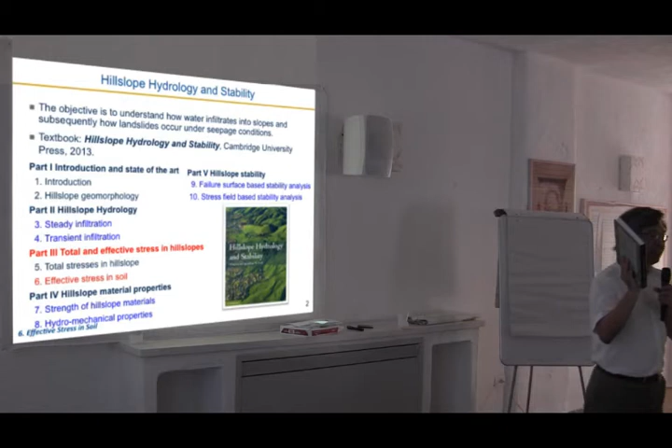So as you see, we have tried to put a framework together, which is physically based. What we try to do is not be too inclusive of knowledge we feel is not directly related to the physical process. But on the other hand, we try to best represent what happens for precipitation-induced landslide, in other words, rainfall-induced landslide. So to be precise, there are two coupled processes that occur for landslide: one is the hydrological process, and the other is the mechanical process. Our book basically, as you see, is divided into 5 parts.

The first part is about the introduction and state of the art. We summarize many of the disciplines that relate to landslide, including hillslope geomorphology as well as hydrology. The second part is designated for water process, the hydrological process in hillslope. To understand better, particularly for graduate students, we divide it into 2 chapters: one is steady infiltration, the other is transient infiltration.

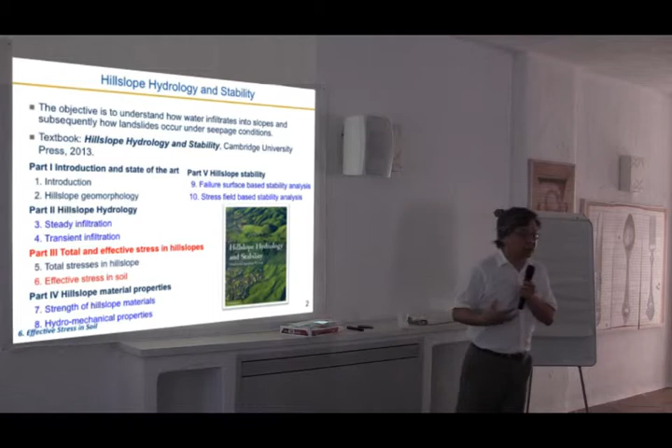What are the necessary minimum material properties? Roughly, there are two categories. One is what we call the strength. Every material has strength. Strength is a state of stress, a limit where you reach the maximum or limit state. So that's the strength. And the second part is what we call hydromechanics.

The hydromechanical property is one of the unique aspects of our framework or this book, because we unify the hydrological property and the mechanical property. If you look at the literature right now, a lot of people in mechanics and soil mechanics reinvent a new material property attributed to water—a strength property which is unnecessary, as you can see in this book. In fact, it can all correlate to the hydrological property we're going to talk about. We'll discuss that tomorrow morning.

And then tomorrow afternoon, the final section is to put all that framework—the hydrological process, the mechanical process—together into the slope stability analysis.

The slope stability analysis, again in this book, we try to divide into two parts. The first is the so-called limit analysis, which has been the hallmark of soil and rock mechanics toward engineering application. But that provides us a vehicle to go forward, which is to do the stress field analysis. This allows us not only to look at the slope as one slope with one factor of safety, but rather a field of factor of safety. It provides a way for us to move forward.

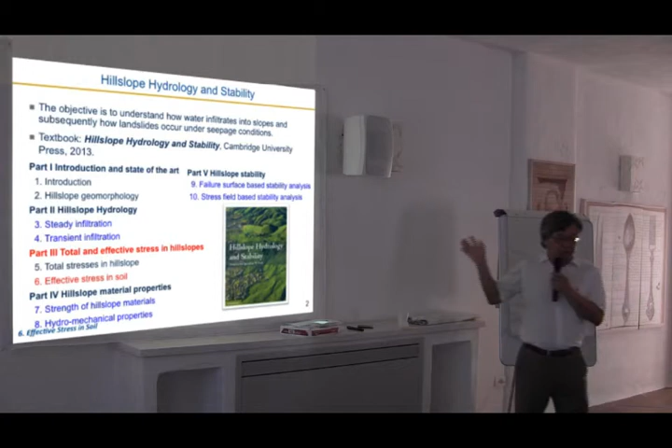It's not the end of the story. In fact, it is the beginning of a new journey, in our view, to be more accurate—because I will talk about it philosophically. What is the current status of design in geotechnical engineering? And what is the problem? How can we move forward? So the last chapter should provide a way to move forward.

We'll talk about that tomorrow early afternoon. So that's pretty much my portion of the contribution. And I'd like to start now with the first topic, which deals with effective stress.

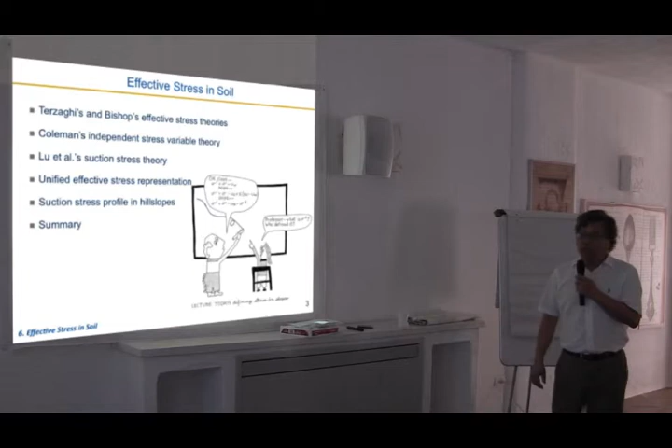For this part, we're going to talk about a few items. The first is to provide an overview of what people have learned, called Terzaghi's effective stress—for the saturated porous medium—as well as the Bishop effective stress, which was explicitly developed in the last century, the 50s, for unsaturated soil. It has some problems, and that's why in the last 40 years most people developed a new theory, a movement, setting aside Bishop. We'll come back to why.

The theory that's been around for 40 years is what we call Coleman's independent stress variable—I'll give a little introduction about that. Then the theory I've been working on in the last decade tries to unify the stress concept from Bishop to Terzaghi, from saturated to unsaturated—how we can bring it together, unified in a sense, also relating it to hydrological behavior, completely correlating to that behavior.

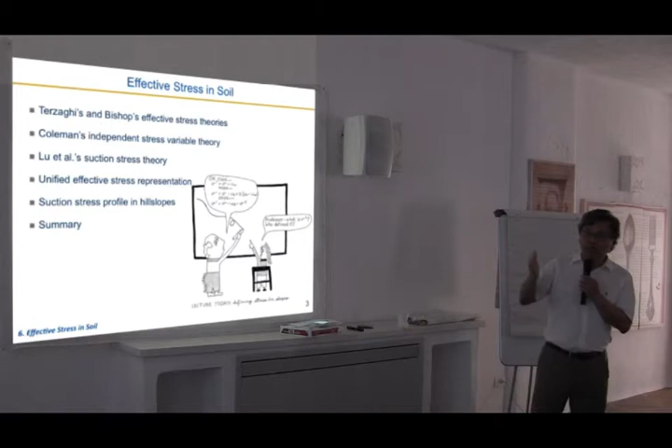We will show in detail that we actually only need to know the hydrological property in order to characterize effective stress and the unified stress concept. The unified stress concept, very importantly, introduces one new terminology I call suction stress. Suction stress is something I defined about a decade ago—it is the stress in the soil due to water. We'll talk about that now, and finally give a little summary.

I prepared this with the idea that people in this audience don't necessarily know mechanics at all, so you can learn a bit about the history of mechanics. The same goes for hydrology—you don't need much background there either. So I'll just use a few slides to talk about the history of mechanics, particularly soil mechanics, and the history of hydrology.

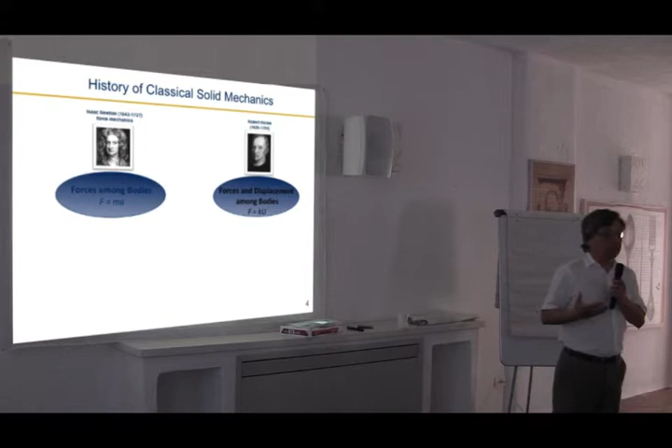In the 17th century, two well-known people contributed—of course history is always written by the winners—in this case Newton, and a little less well-known, Robert Hooke. Robert Hooke is known for other things, like Hooke's law, but he also contributed to mechanics. To some degree, historians in the last couple of decades have dug out Robert Hooke's diary and found he's not as bad as people made him out to be. Historically, because Newton prevailed, there's always been controversy about this figure.

But the bottom line is what they contributed to mechanics, the foundation—in Newton's case, looking at the amount of force among different bodies.

The well-known Newton's second law states that whatever force you have, fictitious or real, is equal to mass times acceleration. Hooke independently worked on the relation between spring constant and displacement, giving us the physical force among different bodies. That's the beginning of mechanics forming into a discipline. Of course humans studied mechanics before that, but this is when it became established as a single discipline.

Very important for moving beyond force among bodies is the stress concept. There were other scholars, but the French scholar Cauchy is the one we credit with founding continuum mechanics. He contributed much more than just that, but continuum mechanics seeks a concept that goes beyond force. It's the stress.

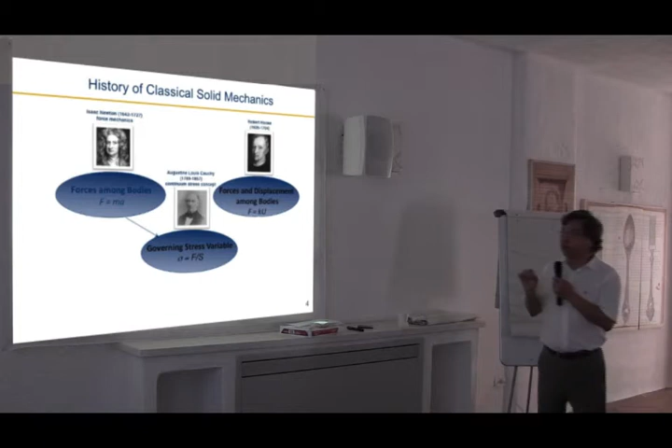So what is stress? Stress is the intensity of force. If you consider the body you're interested in, within the body, what is the intensity of the force? That's the stress concept, and it's also the foundation of what we today call continuum mechanics. So that's roughly the concept of stress.

Along this line, concerning human design, the strength of material looks at the limit of those materials under different kinds of stress. We can define different criteria, but one well-known criterion, used today in virtually all geotechnical engineering design, is the Mohr-Coulomb criteria.

This particular criteria relates stress quantities through two simple parameters. It states that shear strength equals cohesion, in other words internal cohesion, plus an additional term due to the normal stress times the friction angle. That is whenever the material's state of stress reaches that state.

In other words, in the shear stress versus normal stress space, it reaches a certain line or envelope. The material starts to behave very differently than the traditional linear or nonlinear behavior. The material starts to fail, a phenomenon we call failure. So that's a very brief overview of the mechanics part.

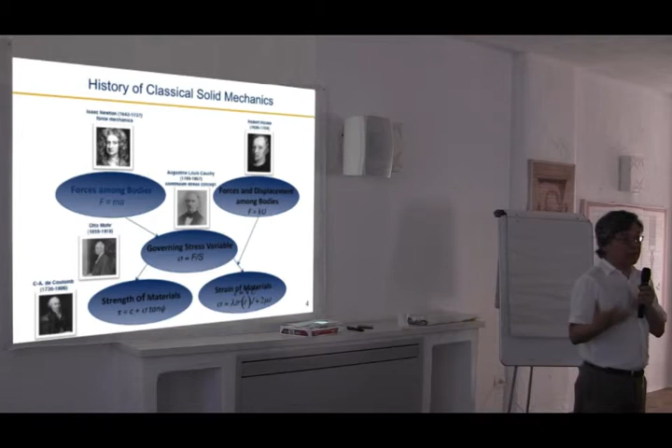If you look at engineering interests, there are two things we care about from the engineering design point of view, or even from understanding nature. One is stress, to see whether the coherent material fails or not. The other is that sometimes the material may not fail, but it displaces—in other words, it deforms under the force, under the stress. That's something we're interested in.

In order to understand the displacement, we need to know the stress. So the stress-strain relation, in its most simple generalized form, is Hooke's law. It relates stress and strain—how, under a certain kind of strain, you can define how much force or stress is produced for the material. Some materials could be stiff, some soft, some ductile, some very brittle. That's the stress-strain relation.

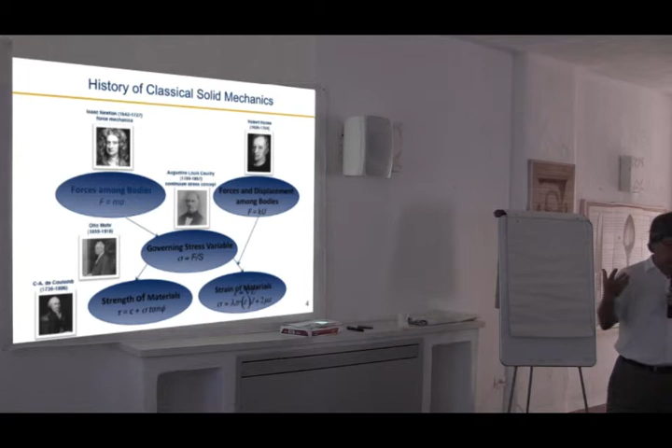The example is Hooke's law. So that's pretty much mechanics up to the single phase—in other words, we haven't talked about water yet. We only talk about it as a single phase, either solid, much like metals and wood. That's basically solid mechanics, as we sometimes call it.

Now let's quickly review hydrology. If you track back, it's slightly later than Newton's mechanics—the 19th century is when we get Darcy's law. Darcy, as people probably know well, was a French engineer in a small city called Dijon. He was an engineer who conducted experiments for the city's water supply, and he did this column test.

The column test explicitly looked at how much hydraulic gradient, or pressure difference, was applied across a column of soil, and then how much water he could collect at the end of the tube. From there, he found a linear relation between the seepage velocity and the gradient of the pressure—or, more generally, the gradient of the total head.

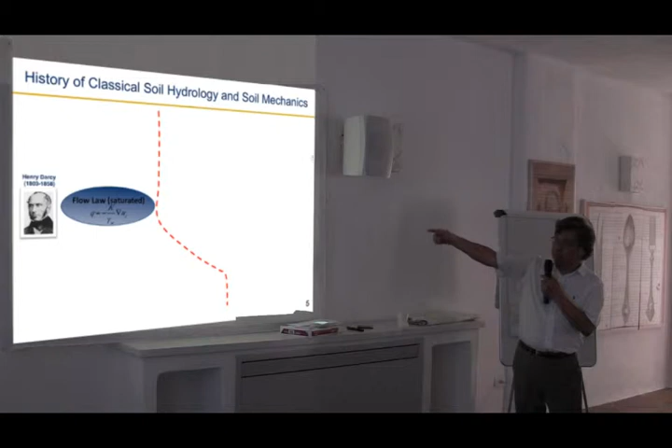The proportionality between the two quantities, the gradient and the flux, is what we call the proportionality constant—sometimes called hydraulic conductivity, sometimes called permeability. It can also be generalized into intrinsic permeability, which relates to the unit weight of water, if you convert between pressure and pressure head. So that's one of the foundational studies.

Later on, people found that it's not necessarily the pressure gradient that determines whether there is a flow from one point to another. The energy in a unit of water can be stored in a pressure form as well as in a potential form. Potential here means gravity, the Earth's gravity. So the pressure can be split into two terms: one is the pressure head, the other is the elevation head. In terms of energy, it's stored in these two parts per unit volume of water: how much pressure, and how high it is under Earth's gravity.

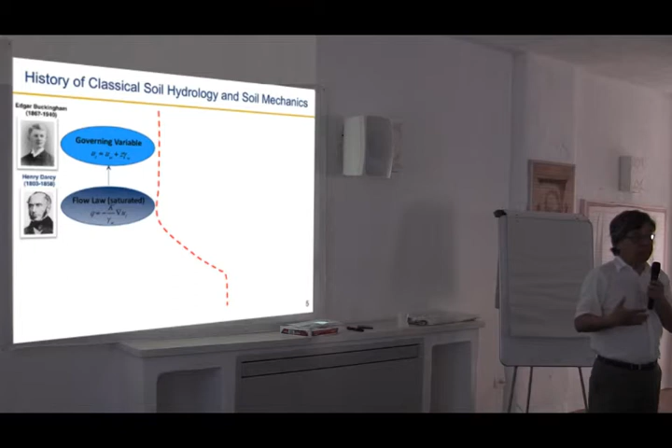That's the total head concept. It unifies the entire potential field. So for anyone concerned, the concept of pressure head was established before this, but this extends it.

Another important work in the early last century considers the transient effect. In the porous medium we talk about, soil and rock, when water flows into a unit, it doesn't necessarily flow out at the same rate. There's a difference, because of compressibility and because it's often multi-phase, there is a storage effect. That's what we call the Richards equation, which is a statement of continuity requirement, relating to the continuity equation.

In hydrology of partially saturated soil, two very important considerations are introduced. One is how to define water content. There is a relation between water content and what we call matric suction for each soil, which is a material property.

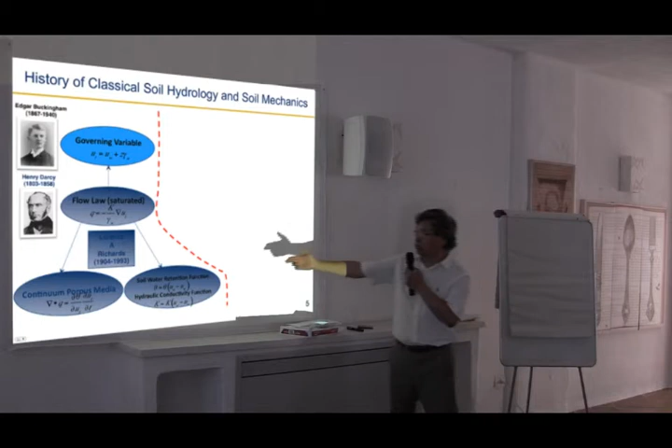Even in Darcy's law, to define a head, that total head has two parts. The elevation part, which can be decided by the reference point, and the pressure part, which under partially saturated conditions depends on water content. That's one of the relations, sometimes called the soil water retention curve, sometimes the soil water characteristic curve. It's a material property because each material has its own characteristic determined by the material itself.

Not only that, for each material it also depends on the wetting and drying state. In other words, if we started very dry or with a certain water content, it will be different. This has a huge implication for landslide problems, because landslides often occur after a dry period. Most of the time we don't have rain, right? Rain only occupies a fraction of a percentage of the year.

During the raining process, most of the soil near the surface on a hill slope is under the wetting condition. But when the rain ceases, it doesn't dry immediately; it starts what we call the drying process. The wetting process and drying process turn out to be very different. We'll learn about these differences in today's second section.

The other consideration is how fast water can move in soil. In the saturated case, we call it hydraulic conductivity. In the unsaturated soil, it's also called hydraulic conductivity, but it's a function of the matric suction, meaning it depends on how wet it is. Sometimes you think of it as a function of matric suction, sometimes as a function of water content, since matric suction and water content are connected by that first relation.

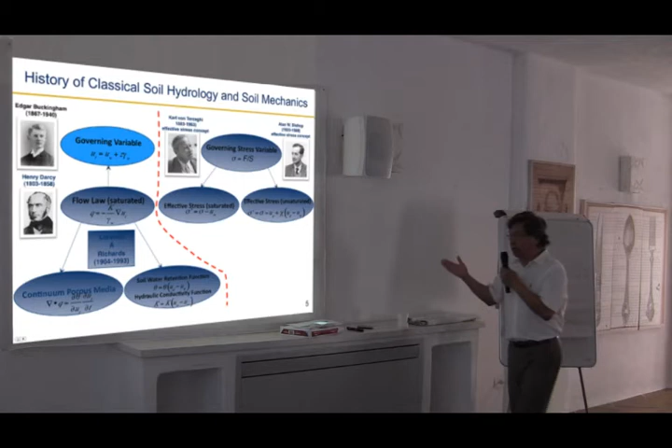But there are some controversies and some experimental data, either misinterpreted or some real problems with Bishop's effective stress. One problem I will point out—this is the main thing that is my contribution—is that if you have soil, when it's dry, just like clay for example, in fact it has a lot of internal stress. So if you look at Bishop's effective stress, it just cuts to zero, meaning there is no internal stress, which is not true. But it is true for sand.

For example, if you go to the beach—of course here it's pebbles, not a beach, not a sand beach—but if you go to a sand beach, you know that dry sand does not have any cohesion, but moist sand has. But for silt and clay, this is not true. Even when it's dry, it actually sticks together. So that's one of the missing parts of Bishop's effective stress.

So to move forward, we actually come up with the unified effective stress. The unified effective stress I propose has been validated in the last decade.

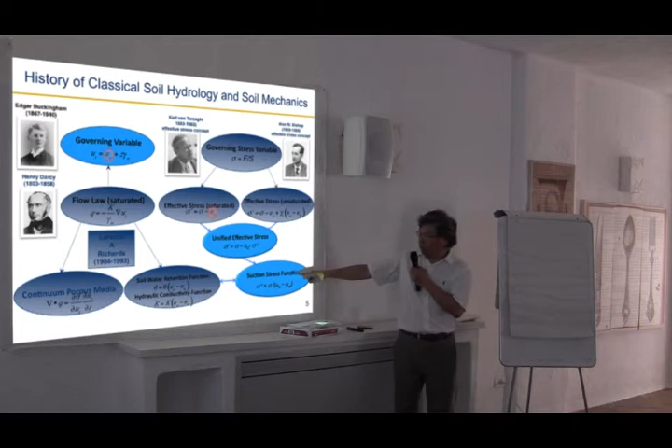So as you see, to link these two, we go further. Now we define this quantity, the suction stress, which defines effective stress, which essentially is the role of water under the saturation condition to the stress, but also unifying between these two properties. So we have reached the stage where if you know the suction stress characteristic function, you can also get the characteristic and hydrological function, vice versa.

So both ways we have verified, one is mechanical, the other is hydrological, but actually they can be defined by the common property. So that's the status of what we have, going back to the connection between these two.

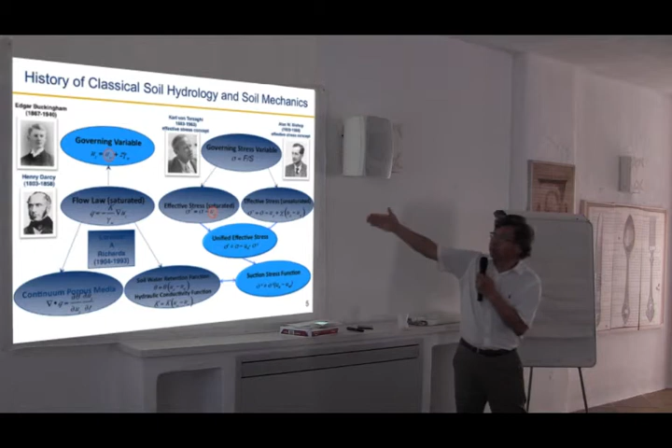As I presented, in fact, it is the history of the last half century or so. These two fields, the vadose zone hydrology and soil mechanics, have been developed in isolation because we've been told to do so by our professors, by our discipline. But in fact, they can be unified, and that's part of the work we have been trying to attempt, to unify these two disciplines.

So now let's talk about some detail of the stress issue. If you look at Terzaghi's effective stress, it basically says the stress concept can be generalized. The stress concept defined by Cauchy early on, you can generalize for a saturated porous medium by drawing a unit volume, sometimes representative elementary volume. On that volume, you only put a stress quantity there, in other words, the intensity of force.

But you cannot just put the total stress, you also have to put water as an additional stress. Under the saturated condition, that water additional stress is compressive, so you have to subtract it from the total. That's the unit of that, also accounting for a saturated soil porous medium. So this is Terzaghi's saturated equation.

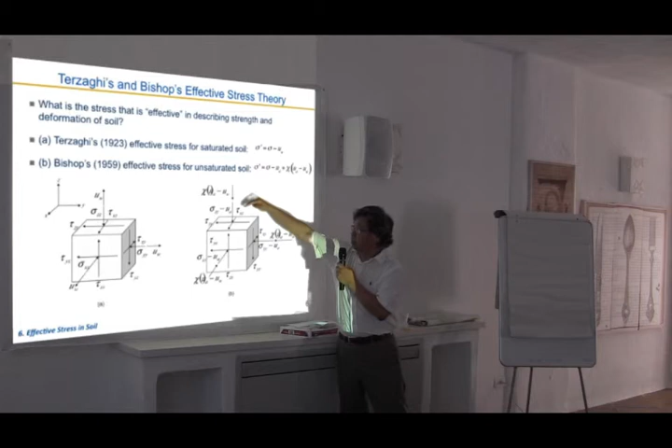For Bishop, he said you can put an additional term, but instead of compressive, it's tensile. So it's in the opposite direction, but if you do this kind of free body diagram, it's equal to matric suction times some scale factor.

Since then, as I said, some of the experimental data was interpreted wrongly at the time, indicating that Bishop's effective stress was not valid. Alternatively, since the 1960s, there's a branch of people, a school of thought, pursuing the independent stress variable approach. This independent stress variable concept is quite different than the traditional single stress variable.

What it basically says is that we have to define two stress variables that are not related to each other. So what are those two stress variables? One is the total stress. The other, just like drawing here, is the matric suction, or the negative pore pressure.

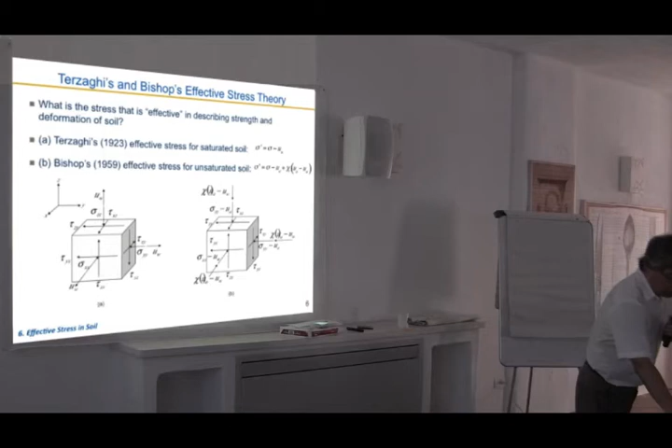So upon that, it's different than what Bishop says about stress being effective. In this theory, we do it independently, so we have to look at matric suction as a stress variable, of course in tensile form. So in the unit volume, it shows like in the bottom. That concept has been pushed forward since the 70s.

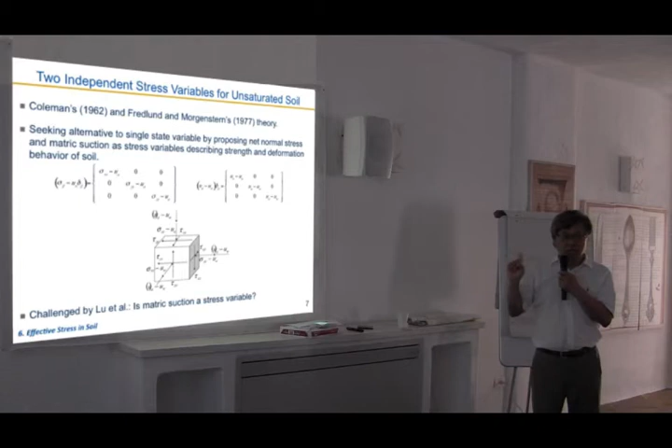If you look at the literature of unsaturated soil mechanics, a branch of soil mechanics, from the 60s up to the 90s, most of the development is based on this framework. Until about 2000, we start to challenge this concept. Let's go back to my first few slides about the stress concept - is this quantity, the matric suction, a stress variable? That's the beginning of the journey where we find that, in fact, it is not a stress. So I will say something about why it's not a stress.

So we start with the stress variable we define, called suction stress. Suction stress is equivalent to, if you draw the elementary volume, a stress quantity.

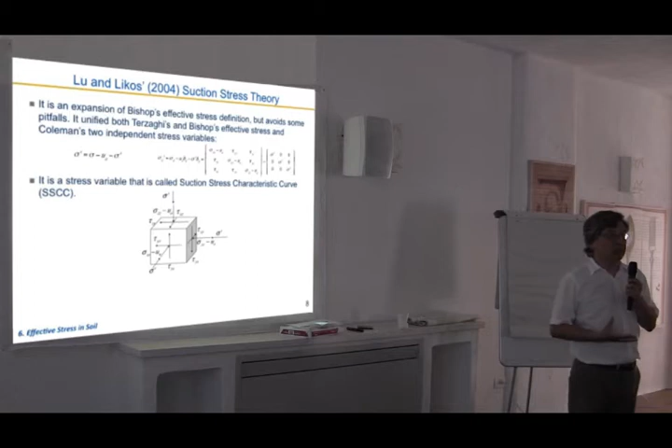In other words, stress is the force divided by unit area. But if you look carefully, matric suction itself is not a stress. We call this stress suction stress. I'll come back later about the matric suction. For the suction stress itself, in the case of unsaturated porous medium, it depends on your saturation, depends on your matric suction—in other words, the state of wet and dry.

So we can ask ourselves a couple of questions. One: is it effective in describing strength and deformation? This is very important because our concern as it relates to natural material is whether it's going to fail, and how much it's going to deform even if it doesn't fail. The second question is how we determine that, because you can develop a theory, and many people have been attempting and continue to do so. The question is, can you characterize that? Can you measure it, or quantify it in a very simple way that most engineers or technical people can use? That is a big, important challenge and question.

Now let's look at the issue of why I make the statement that matric suction is not a stress variable. This diagram actually shows clearly why matric suction is not a stress variable.

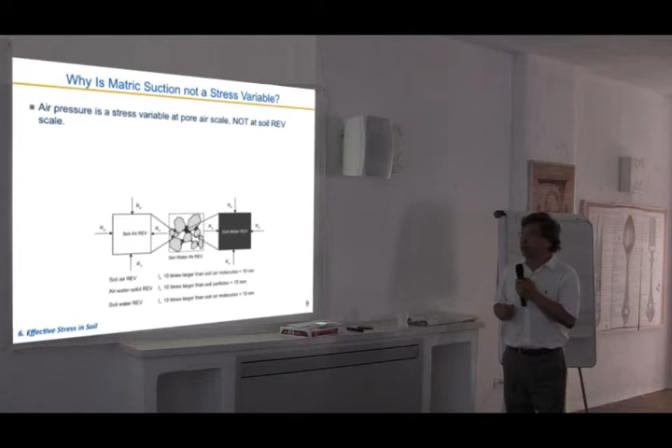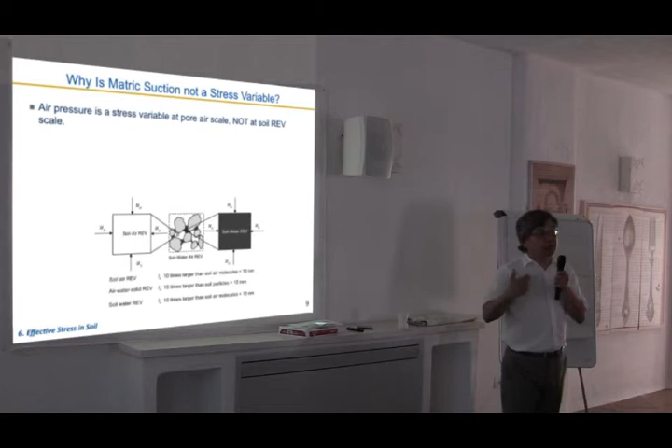Let's first look at what air pressure is. If you have a porous medium, the air is occupied 100% by things like nitrogen and oxygen. So the air pressure is basically a thermodynamic energy state of a volume of air. But if you go to the porous medium, you have solid, air, and water—three phases of the material. If you zoom into the air phase, the air pressure is still valid; in other words, it's a stress of the air per unit area of the air, inside the air. By the same token, if you look at the volume we're interested in, air pressure actually is not... because in total you have to divide by the entire area, which has solid and water too. It's not the stress that we are concerned with.

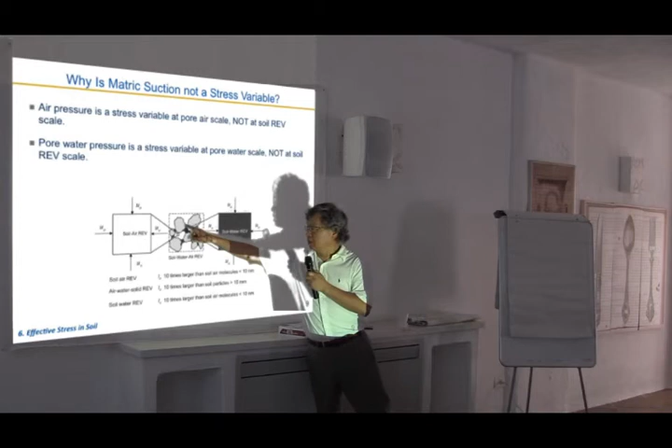By the same token, the pore water pressure is defined at a much smaller scale. If you use a continuum mechanics concept, it's defined in the pores. Of course, if you have a saturated medium, then the scale could be very large—it's fine because all the voids are occupied by water. But in this case, under partially saturated conditions, you have to look at the scale effect, which is important. So it is a stress when you look at the little menisci or the soil water, but it's not a stress when you look at the entire volume, because the total force integrated and divided by area in that case is not equal to the quantity of the pressure.

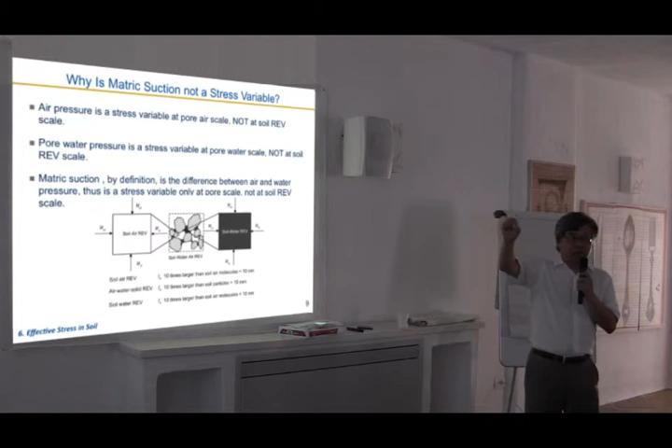So matric suction, what is it? By definition, it is the difference between the air and water pressure. So it's a stress variable only at the pore scale, but not at the representative elementary scale. The representative elementary scale is the one we deal with for the material—we consider a point. If you say I'm talking about a point on a hillslope, that particular point will in fact include three phases—that's the representative elementary volume scale. In other words, that's what we can use as a stress quantity.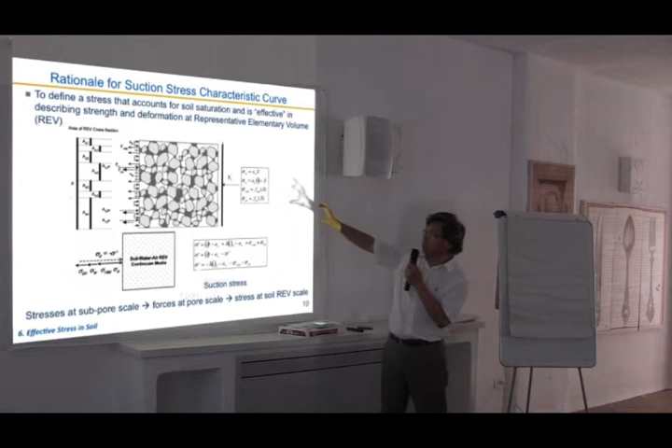To be a bit more careful and quantitative about representing our distribution, you can think about drawing a representative elementary volume—in this case, tens of particles—sufficient to define a point for what we use as stress. If you do so, you'll find that the contribution of air pressure, which is established at the pore air scale, has to be upscaled, multiplied by the area where there is air. By the same token, the water pressure too—it depends on the saturation, but you have to integrate it times the area where the water is acting. If you do this, you'll find that it's not matric suction, but the quantity that really represents the stress through the representative elementary volume, which we call the suction stress.

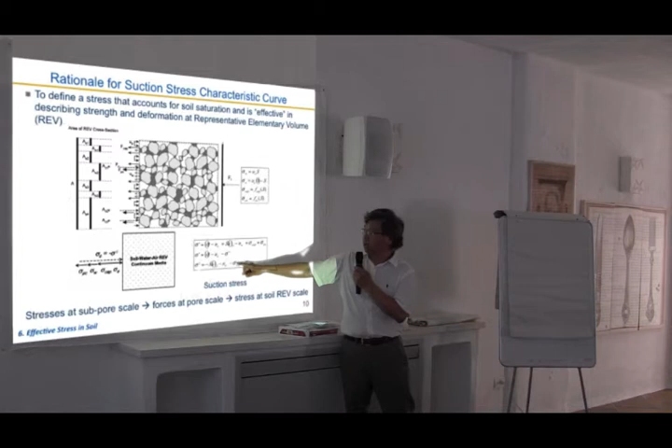So that's where suction stress comes from. It has components due to the negative water pressure related to saturation, and it also has to do with surface tension. Surface tension has been considered in many conceptual models, which is basically due to the stress or force at the interface of water and air.

It also has to do with one of the very important quantities, what we call the physical chemical force. What is the physical chemical force? It's something that you don't have a lot in sand, but you have a lot in silt and clay. It's basically what we call van der Waals attraction, which occurs at the atomic scale because the asymmetry of the electromagnetic field causes attractive force.

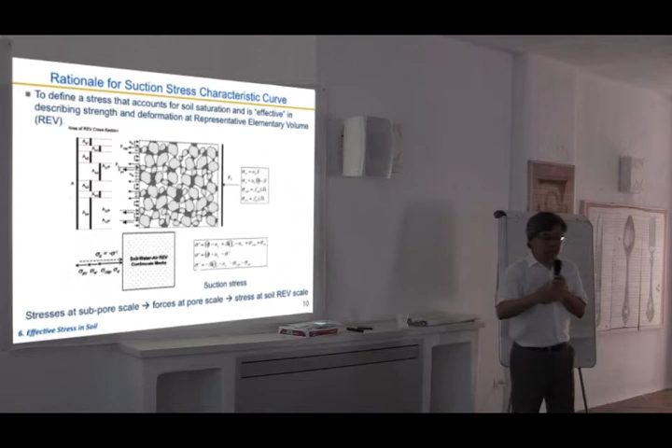So van der Waals attraction is one of the very important physical chemical forces, as well as what we call double layer. Double layer is again formed because of the clay mineral. You have this water that can form cation layers, and that will be called double layer. Because of the existence of double layer, they can have an additional attractive or repulsive, in most cases repulsive, force among the particles. So the net of these three origins, as we understand, is what I call suction stress.

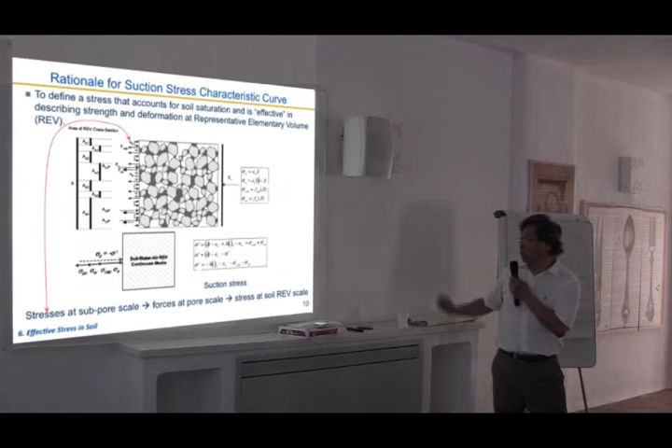I can explain this a little bit more by looking at each quantity individually. But if you lump all of these into the scale of what we call the representative elementary scale, the scale where we can define stress, you will find suction stress is a stress variable. Then you can use the same parallel to the traditional classical total stress. But you cannot use matric suction, because it requires upscaling before you can put it into the elementary volume to be parallel to the external stress like total stress. So that is one of the very fundamental and basic concepts that we talk about here.

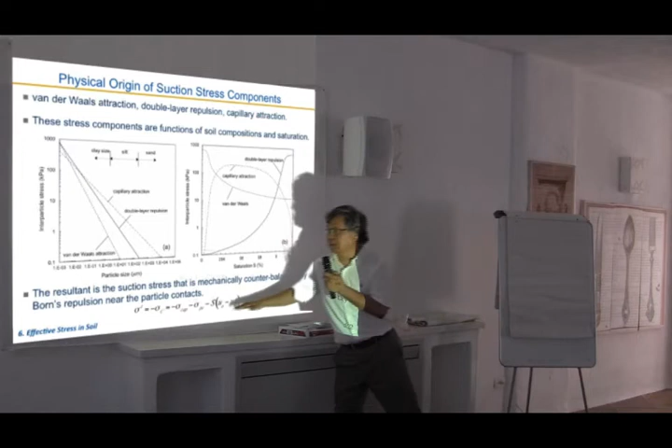So let me explain the sources of what I call the physical chemical forces, and how they depend on different kinds of material. You can think of it as depending on two controls. One is what kind of material you have - whether you have a clay mineral, a silty soil, or a sandy material like quartz. The other is how much water you have, because once you have water, those forces or stresses at the interparticle level are going to be different.

Specifically, you can look at the first diagram, which plots interparticle stress versus particle size - graphically, the sandy size, the silty size, and the clay size. There's a lot of correlation if you study mineralogy of rock and soil - a correlation because of Mother Nature's process between the different minerals and the size. So when you go to the beach and find a lot of silicon oxide, or sand, it's not by coincidence. It's because those materials are very resistant to weathering, while other materials eventually turn into clay or silt and settle on the bottom of the ocean.

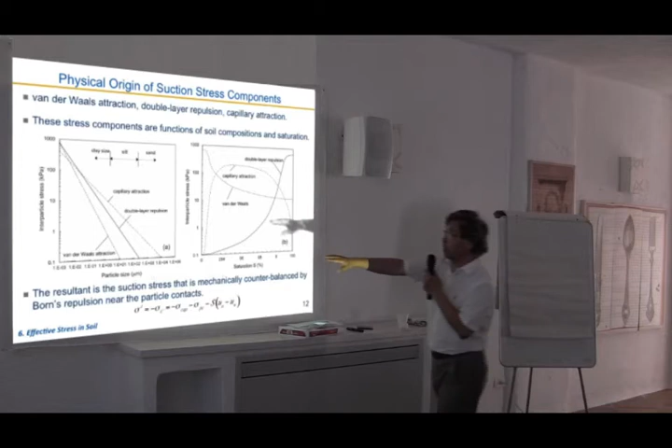So there's a correlation, and you look at the correlation and find, for example, van der Waals attraction - the attractive force, shown with a dashed line - depends on particle size. Virtually you can ignore van der Waals attraction if you look above 10 micrometer particles; it's almost negligible, and that's why sand does not have van der Waals attraction, or virtually none. But it increases as the particle becomes smaller and smaller, increasing up to several hundred kPa for really fine material.

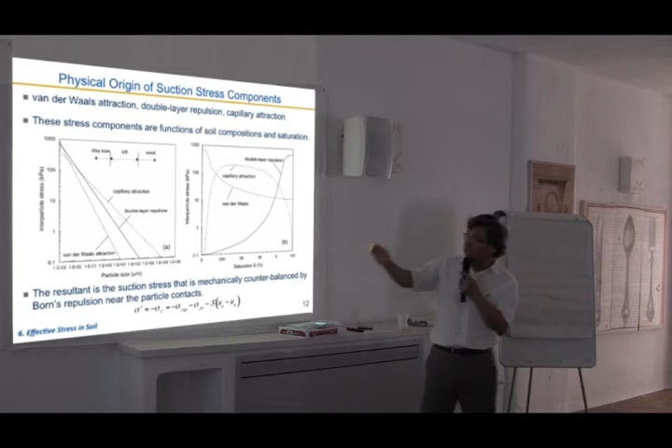If you look at capillary attraction, it's similar. Capillary attraction is determined by the meniscus radius, if you look at Kelvin's law. The smaller the particle size, the smaller the pore size, which promotes higher capillary stress. On the other hand, if you look at double layer, it's also similar, depending on particle size. When you have clay, you have a lot of clayey particles and a lot of surface area, which promotes double layer. When you have silty or even sandy material, you don't have any, or virtually none, double layer. So that's how they depend on particle size or mineralogy.

The other important part is how they depend on saturation, and that starts to become complicated. For example, if you look at capillary attraction, due to the interface of air and water - when you have zero saturation, you don't have an interface, so there's no attractive capillary force. On the other hand, when you're saturated, you also don't have an air-water interface, so it becomes zero too. So somewhere between, it reaches a maximum. That is very well illustrated in sand: if you want to build a sand castle, you have to put in a certain amount of water content.

That depends on the particle size too. And then you actually can reach the maximum capillary stress that can build a nice sand castle.

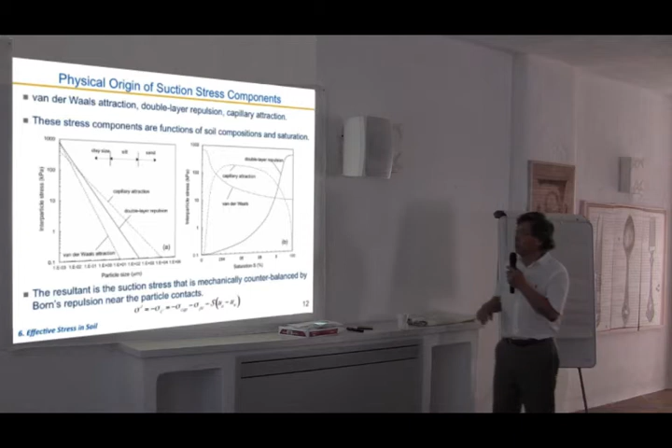If you look at the van der Waals attraction, it's most strong when the soil is dry. Why? Because when you have a solid-to-solid contact, the van der Waals attraction, which is Hamaker constant, is the highest. But when you start to have hydration, so you have a contact with basically solid, water, and then maybe more water and then solid, the van der Waals attraction is going to decrease. But it's not going to decrease to zero, it's going to decrease to some magnitude. So that is the van der Waals attraction nature.

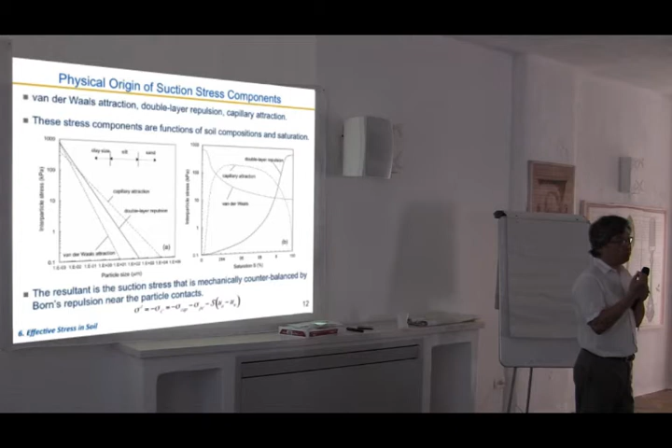And that is why when you have a saturated soil, you have a cohesion. Clay, you have a cohesion. And where does that cohesion come from? That cohesion mainly comes from these manual attractions. But as the clay dries, the van der Waals attraction becomes stronger because it promotes more and more solid contact. And so that is the dependency of that. And that can also go up to a few hundred kPa. And that's the order of magnitude.

And then if you look at the double layer repulsion, it's the other way. In other words, double layer repulsion only forms when you have a lot of water. Saturated is the highest one. And it also depends on the pore chemistry. Whether you have a high concentration of salt or low concentration of salt, it will actually change the influence of the double layer. So that is the dependency of these things.

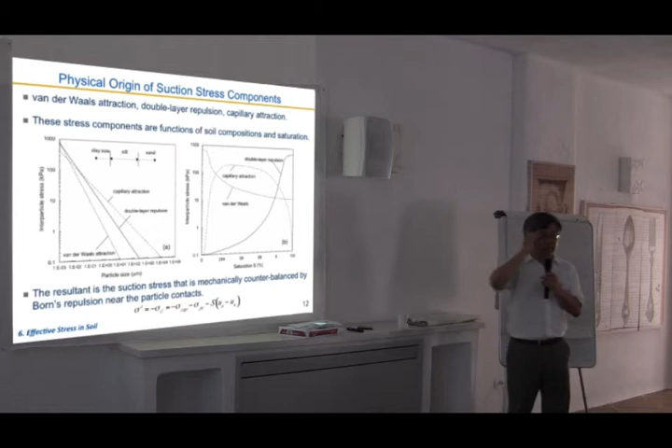It makes this interparticle stress. It's somewhat complicated because it's a combination of these two findings. One is repulsive, the other one is attractive. So they become net, and that is what I call the suction stress. So that is the origin of the suction stress. If you put all these stresses together, what you find is this diagram.

It shows that interparticle stress depends on the saturation, and depends on what kind of material you have. For sandy material, you have this increase-decrease pattern. It reaches the maximum at about a few kPa in magnitude. So a few kPa is somewhere optimum for you to build a sand castle of a meter or two. You cannot build a sand castle higher than 2 meters.

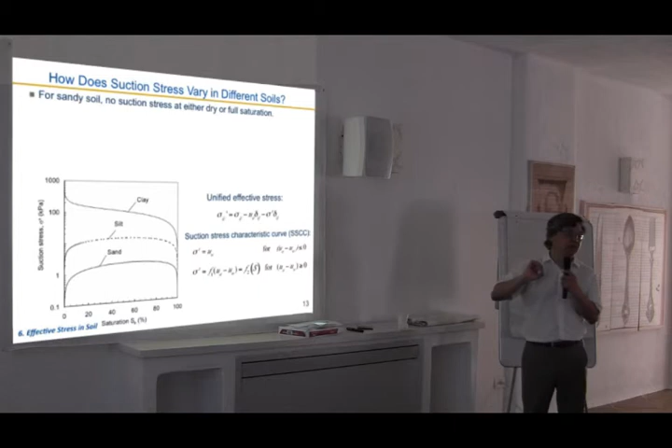Why? It's because the size, or pore size, depending on the particle size of sand, is at the millimeter scale or sub-millimeter. For sand at that sub-millimeter scale, you don't have the physical-chemical force. In that case, you can only have the capillary force, and the capillary force can only maintain that much, a few kPa. So a few kPa of interparticle stress, it can convert to shear resistance. I will talk later on about 10 kPa, and that will be able to sustain a couple meters of sand castle. And the silty soil is different.

Now, look at the clay. Clay is very different. Clay no longer has that increase-decrease pattern. It's actually a monotonic increase, it's attractive. The saturated case has the smallest value, which is actually related to what we call apparent cohesion. So I mentioned the Mohr-Coulomb criteria, the two parameters, cohesion and friction angle. The cohesion, where does the cohesion come from? Why doesn't sand have cohesion? Why does clay have cohesion? It is due to the saturated physical-chemical force of clay.

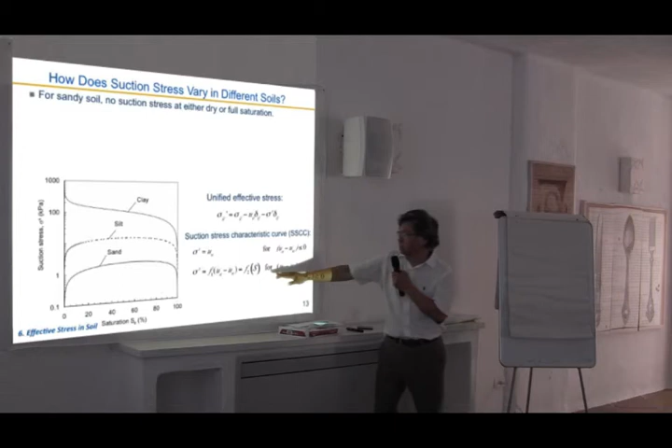So the suction stress concept comes from these three, in a way that it's basically either a function of saturation or a function of matric suction.

So the magnitude also changes. In other words, we relate to the slope stability, and this plays a very important role. For example, if you have a silty soil, in the dry case, they can have a few tens of kPa. But if you have heavy rain, that tens of kPa of stress can disappear almost instantaneously.

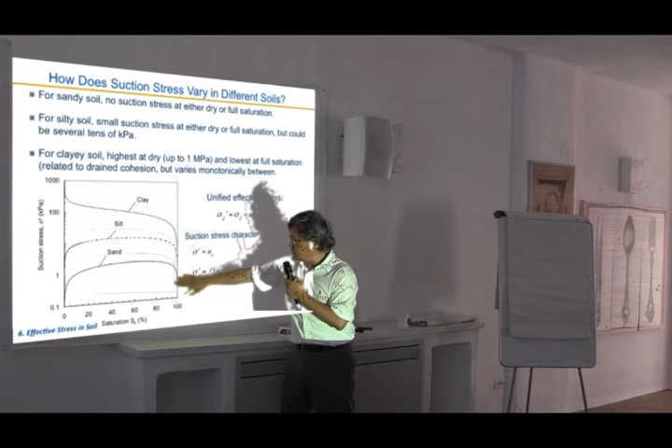because of this reduction from dry state to completely saturated state. This part will be completely reduced. And sometimes in some areas people call it collapsing soil. It's not collapsible, but upon wetting, because it forms under semi-desert areas. But when humans start to live in those areas, they like to put irrigated water to those soils, or do gardening, and so it starts to collapse, because of the disappearance of these tens of kPa.

Now, to quantify that, go further: what is the suction stress? In fact, you can characterize the suction stress by the shear strength test. On the left, it shows that up to now there are a lot of tests that have been done for partially saturated soil materials. Now what they find is if you have a saturated soil, they behave like this. But if you have unsaturated soil, they actually go up, depending on matric suction. The classical interpretation is that the cohesion increases as the soil becomes dry.

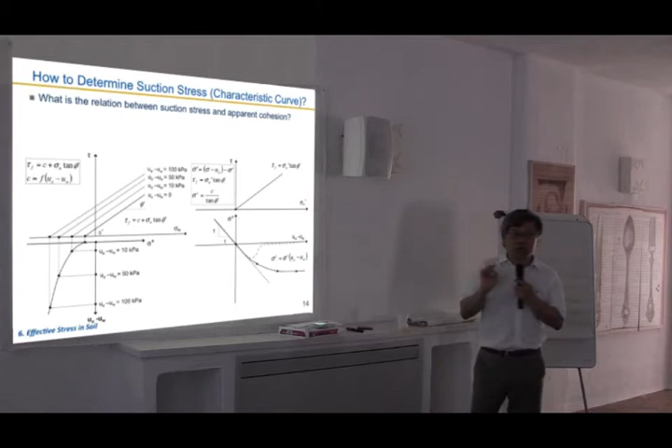But where does the cohesion come from? This is one of the key points in my theory. If you look at this diagram, the cohesion here is actually a shear stress, because it's an interception of the vertical axis. So it's a stress, but in the form of shear stress, not normal stress. But where does it come from? It comes from, if you do a projection back to zero, those points. That point is what I call suction stress. It's a point that is not zero, it's a zero shear stress, but it has a definite magnitude of a tensile or interparticle stress.

And that's why if you have a sandy material, you don't have cohesion, so therefore you don't have suction stress. But when the material becomes more clay-like, due to the physical chemical nature of the saturated soil, it actually increases more negatively. So that is the origin.

So what we traditionally call the apparent cohesion is, in fact, a function — it comes from this isotropic effect. Or in a simple way, just think of a particle of material increasing the cementation, just like cement. But that cementation depends on two categories of property: one depends on what kind of material you have, whether it's clay or silt. The other depends on how much water you mix in. If you put a lot of water, it will be different than a little bit of water. So those two things basically control the magnitude.

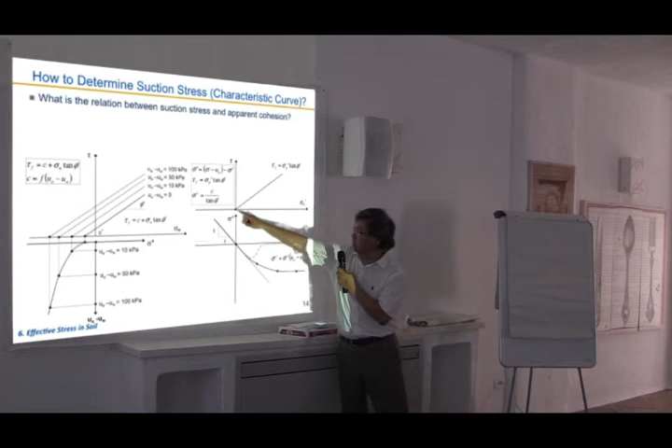So conceptually, I draw this one — if I draw it here, it's a little more clear. Suction stress is the vertical axis, and the horizontal is matric suction. When this becomes a negative matric suction, which is pore pressure, there's a one-to-one relation between the pore pressure and suction stress, and that's the picture of the classical effective stress concept. But when you become unsaturated, even though you're above the water table, you can be negative before the soil starts to desaturate.

Sometimes we call this point the air entry value. Below the air entry value, it's still a one-to-one relation. Above the air entry value, because the soil starts to desaturate, you can no longer treat matric suction or water pressure as a stress value. So you use suction stress, and it actually changes depending on what kind of soil you have. It can go to zero for sand, or go to an asymptotic value for clay.

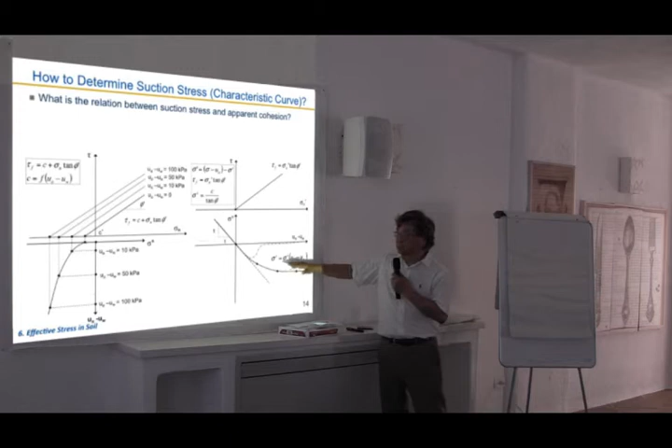So the key is to characterize this suction stress — not only to characterize it in the mechanical way, which I showed you here with a shear strength test, but also to characterize it in a hydraulic way, for example relating it to the soil water retention curve. So that's the important thing.

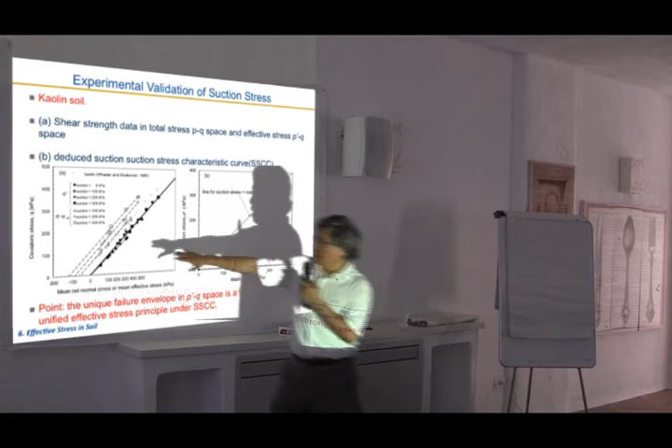And is this concept of suction stress valid? That's what we show here. I use a lot of other people's experimental data, conducting shear strength tests. You can look at the horizontal axis in different ways — one is total stress. People conduct the experiment under different matrix suctions.

You see with the hollow points, different matrix suctions give different stress values. But if you use the suction stress concept, find the suction stress for each corresponding matric suction, and use the effective stress on the horizontal axis, you find that it actually follows one line — which validates the suction stress concept, or the effective stress concept extended from saturated to unsaturated conditions, using suction stress to replace pore pressure.

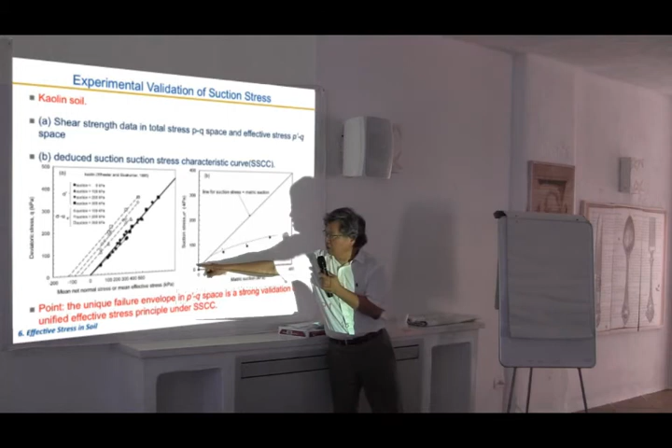Each of those experiments has a different envelope—you can put a projection there, even in the vertical way. So that is how suction stress depends on matric suction. You start with the saturated, one-to-one relation between suction and matric suction and suction stress. At some point, you start to desaturate the soil, and it bends, becoming smaller and smaller instead of following this 45-degree one-to-one relation. That is the suction stress characteristic curve.

This experiment data indicates that the concept of unified effective stress is valid. This is another soil called compacted soil, prepared in the laboratory. As you see, if you use the total stress concept, it's not a unified envelope. But if you use effective stress, it can be effectively put into one envelope. So again, the corresponding suction stress indicates the validity of this.

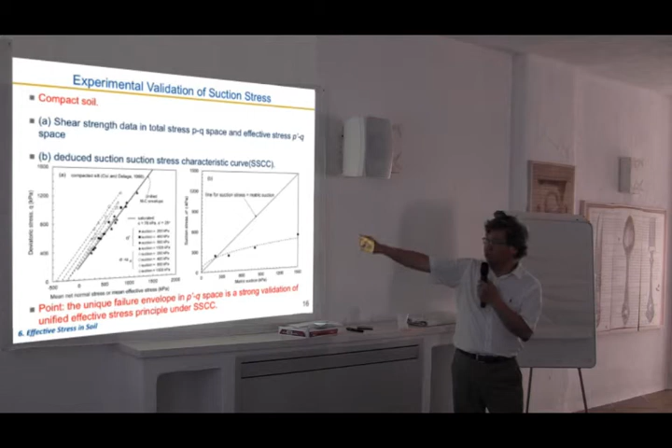Now I will explain a little bit about the meaning of suction stress. If you look at this diagram, the vertical axis on the left is matric suction, on the right is suction stress, and the horizontal axis is saturation, or effective saturation. This line, on the left, is what we call the soil water characteristic curve. The theory is formulated such that you can completely correlate soil water retention and suction stress. So what is suction stress physically, or in terms of an energy concept?

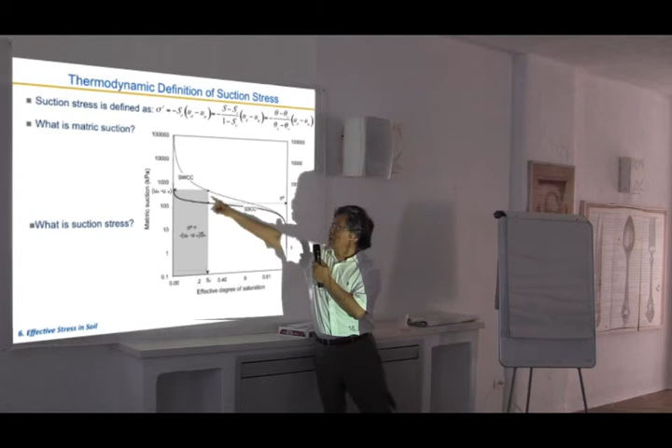If you look at the soil water retention curve at any point—just look at this point—what does it mean? It indicates, at a particular water content, how much energy in terms of pressure you have. That is exactly the meaning of matric suction. But if you look at the area under the curve, in other words, it is the matric suction times the degree of saturation—that's how much energy is in one unit of unsaturated soil, in the soil water. So that's exactly what we define as suction stress.

So we can define this second curve, the suction stress characteristic curve. No more, no less—just use the area under the soil water retention curve at each point. It's just the dot product of that. So that's the exact meaning. The interpretation is that the negative pore pressure in the bulk water—all the energy is converted to make up the stress at the representative elementary volume. That's the meaning of suction stress.

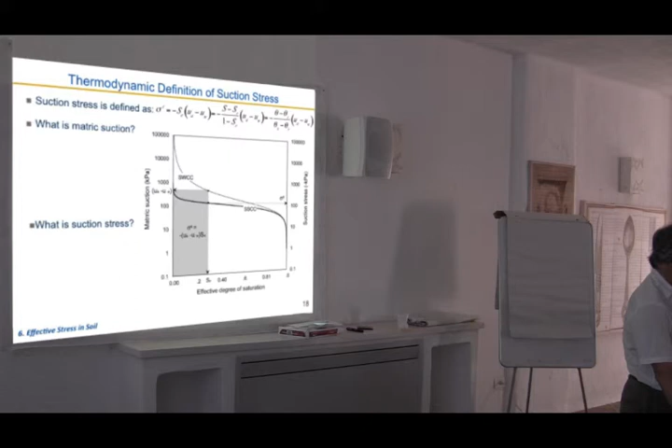So what is matric suction, as defined, and what is suction stress? The difference: matric suction precisely is the mechanical energy in soil water per unit volume of water. That is the meaning of matric suction, or negative water pressure. Now, what is suction stress? Suction stress is the mechanical energy in soil water per unit volume of soil. In other words, it upscales that from the little tiny menisci into the volume.

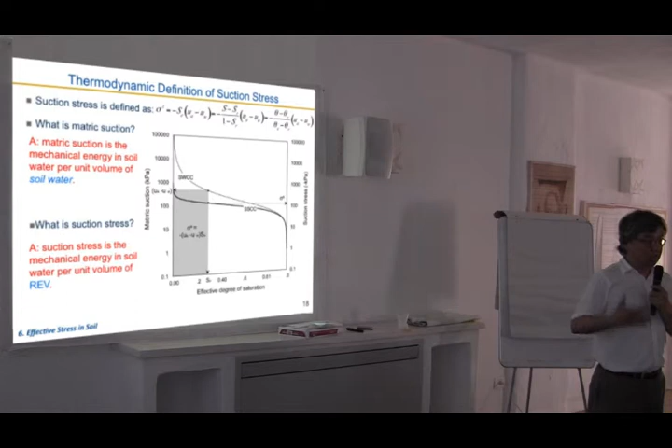Roughly, it is the area under the soil water retention curve for each point, which forms the second function. So by doing that, if you know the soil water retention, you know your effective stress, because they are internally correlated. Vice versa, if you know the suction stress, you can know the soil water retention. And we specifically give an example of a specific form.

For example, if you use one of the widely used Van Genuchten soil water characteristic curves, well established in vadose zone hydrology, you can form the suction stress as a function of saturation. Graphically, the left plot is the soil water characteristic curve, the right is the suction stress for different soils. The difference is that those are monotonic functions, but here the interparticle stress really depends on what kind of material you have—it could be non-monotonic or monotonic, as well as differing in order of magnitude, depending on the mineral and saturation.

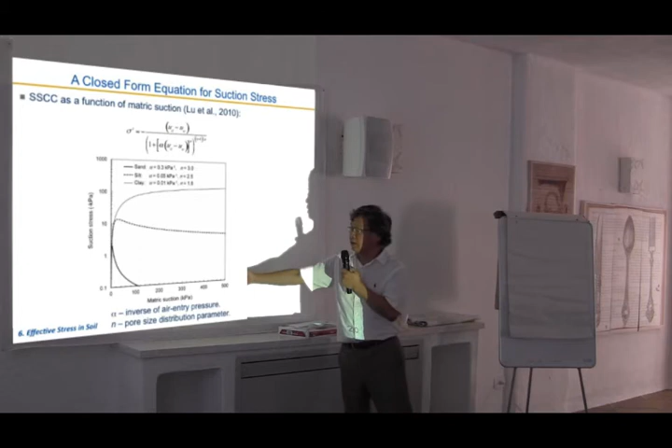You can also plot this as a function of matric suction instead of degree of saturation. Sand increases and then drastically reduces. Silt increases and gradually reduces. And clay just increases all the way. What's beautiful about this is that all those complex forms in the particle follow the same mathematical form, with just two parameters—and those same two parameters also define the soil water characteristic curve.

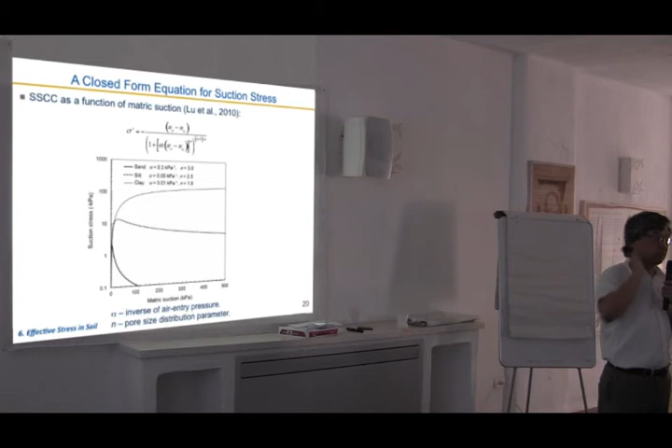So basically, that's the first section. I will just use a few slides to give a little bit of extrapolation and say, now we talk about suction stress or unified effective stress. The stress is in the soil skeleton for partially saturated material or variably saturated, which includes saturated and unsaturated.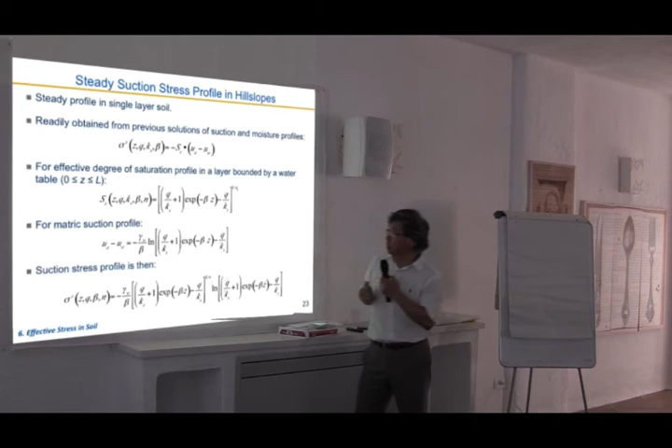Same thing for the matric suction or water pressure above the water table. The suction stress concept is very simple now because it's basically based on the theory of energy in the volume of the soil. So that's equal to this profile times this profile, which becomes this profile. So back and forth — it looks a little complicated, but if you read the program papers, you can come up with something pretty simple.

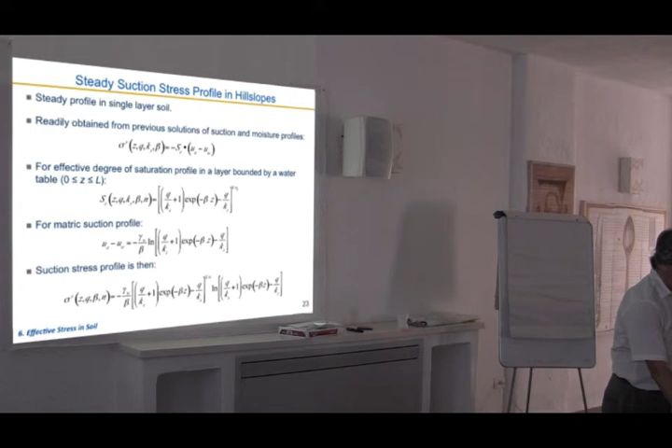Here's an illustration: let's say you have 2 meters of sand layer. Here is the water table, 2 meters above the water table to the ground surface. We can look at how much, in that case, versus the water content — how much water content depends on the infiltration. Hydrostatic, which means no infiltration, is the solid line. If you have infiltration, it's this other line — the matric suction and the water content will increase compared to hydrostatic. And if you have evaporation, it goes the other way.

And what is the matric suction versus water content? What is the matric suction versus water potential? We will talk about this after the break. This is the hydraulic part. But once you have that, you can know the suction stress.

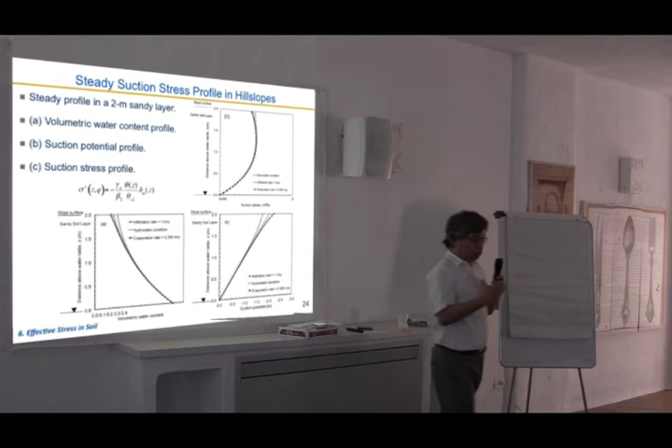So here's how to think about the suction stress — just look at this profile, the other profile we'll do very quickly. What this says is, at the water table for this sandy material, you do not have any cohesive force. Above the water table, it starts to increase, and at some point it reaches a maximum and starts to decrease a little bit. That also depends on your infiltration or evaporation, but in the case of sand, it's not so much of an effect.

In other materials, as I'll show you — this is like a silty material — you see that the suction stress actually varies quite a bit depending on how far away you are. For example, infiltration will promote less suction stress, in other words, less stable. Pay attention to the negative sign — even though this is shown as positive, just for graphical purposes, the more negative it is means the more it pulls particles together, which means higher effective stress, which means stronger. So that's the general pattern for silt.

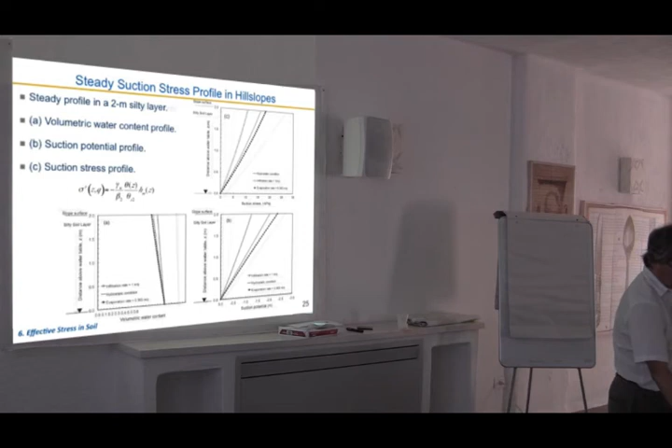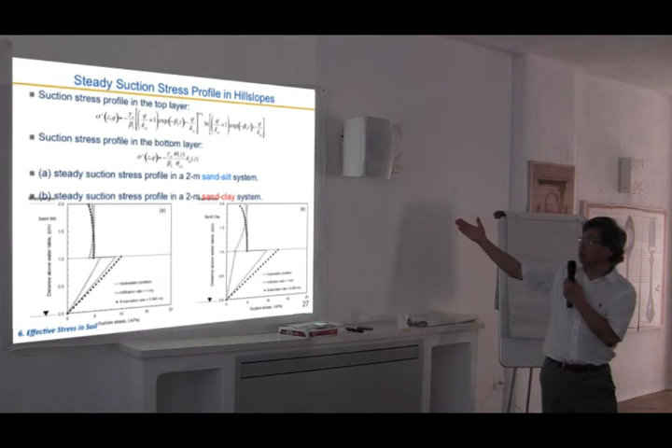Now let me give another example: clay. You see that clay varies a lot in terms of how infiltration affects it. And of course, there's the multi-layer case — I think this material, you'll have fun with it in particular, in the book. Multi-layer behavior is much more complex, but we can also use this framework. Depending on what you have — the example here is sand over clay, where the top is sand and the bottom is clay.

And you can have all sorts of scenarios, and I won't go through that detail. You can study it. And then another example is a transient one.

We can also look at what happens if we have a sudden rain, like this, time versus the head at the surface. In other words, if it rains on the surface, let's say the head becomes 0 for a certain time, and then stops. What happens after the rain stops, or even during it, is the water starts to percolate down.

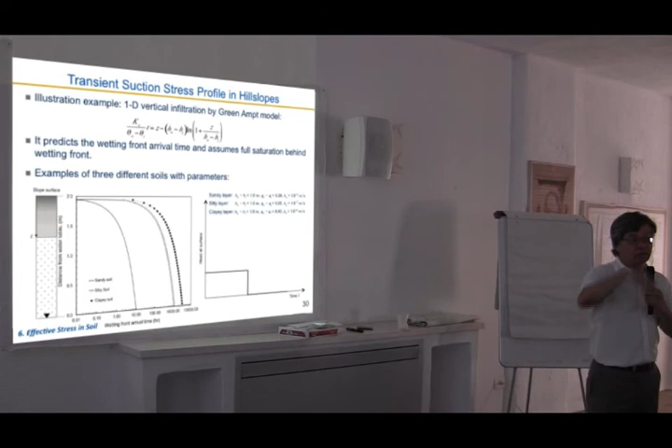So the water starts to percolate down, and you can actually look at the arrival time of the wetting front. The horizontal axis is the arrival time, the vertical axis is the distance as the water gradually goes down. And that depends on the kind of material. Some materials will be faster than others - for example, sand can go down very fast, while clay will be slow.

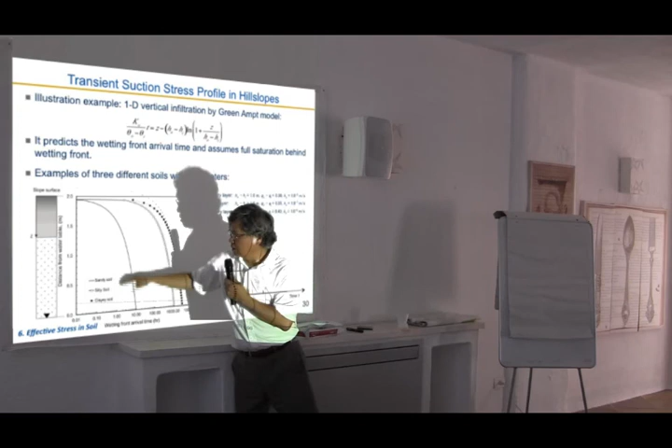That process lets us see what the suction stress and water content are - this is the transient example we're going to talk about after the break. You can see the suction stress correspondingly depends on this. Originally, at time 0, you have substantial suction stress, as I showed in the previous case. But once it starts to infiltrate, the suction stress disappears, and as time goes on, the wetting progresses and the suction stress gradually goes down.

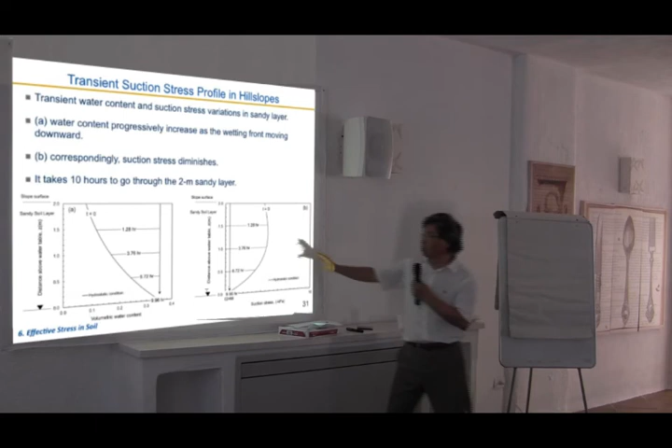This is very illustrative because if you have a layer of slope, even if the suction stress is reduced in such a simplified fashion and disappears at some point at a certain depth, it can cause the shear stress to reach the failure criteria. That's why, in many cases, we know it's at the interface of bedrock with soil where it's most vulnerable. But that's not always true - in some cases, the failure occurs within the unsaturated zone or within the soil layer.

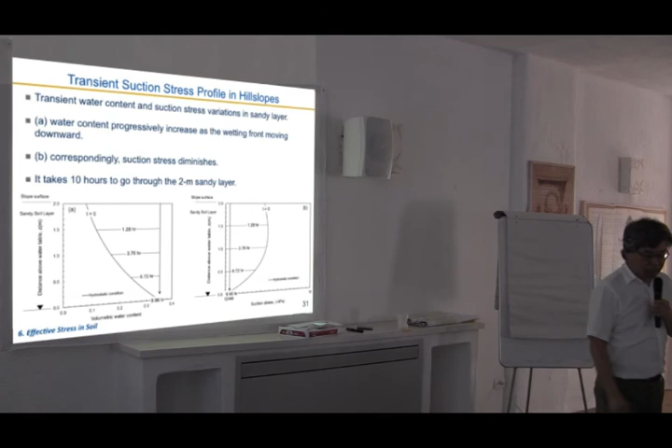How do you explain that? This is one way to explain it. Basically with that, this is just a different kind of scenario, different kind of soil, and you can see that. I'd like to make a few points before we take a first break.

First, a stress variable effectively describes two things: one is strength, one is deformation, presented in the suction stress characteristic curve form in this framework. The second point is what the suction stress characteristic actually does - it expands Terzaghi's effective stress into unsaturated conditions.

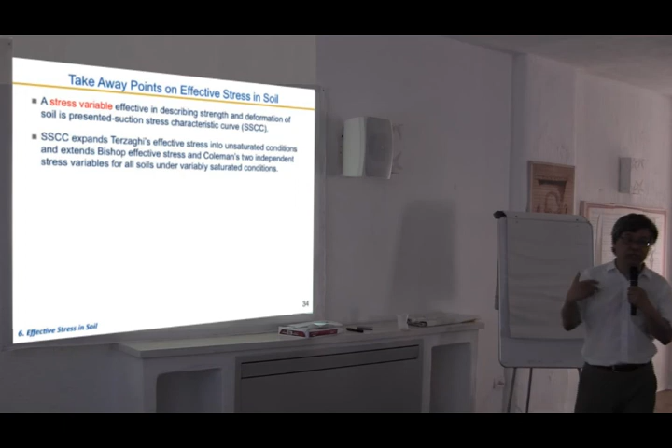We don't really think about it that way - we think it extends Bishop's effective stress, as well as two independent stress variables for soils under variably saturated conditions. The third point, as we've shown and as you can see in the literature, is that this theory has been validated against experimental data - not only for shear strength, but also for hydraulic tests and even deformation tests.

And this also correlates - that's a very important point. In other words, the suction stress allows you to characterize the stress or effective stress for partially saturated material. You can know that from the soil water retention curve.

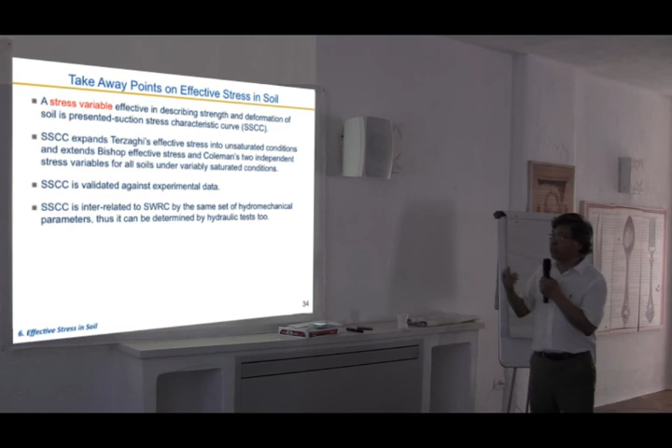That's basically the premise - the way you can unveil different phenomena: the flow phenomenon, the chemical contaminant transport phenomenon, heat transfer, as well as the electrical field. In porous media, you can use the same common properties - in this case, the pore size and the intrinsic properties.

As you see the dynamics of suction stress in the field in the last few slides, it could be fully determined once we know how the water is going to transport in porous media, which I will talk about after the break. And generally, the wetting process - if you want to get away without doing a quantitative analysis - generally diminishes the suction stress.

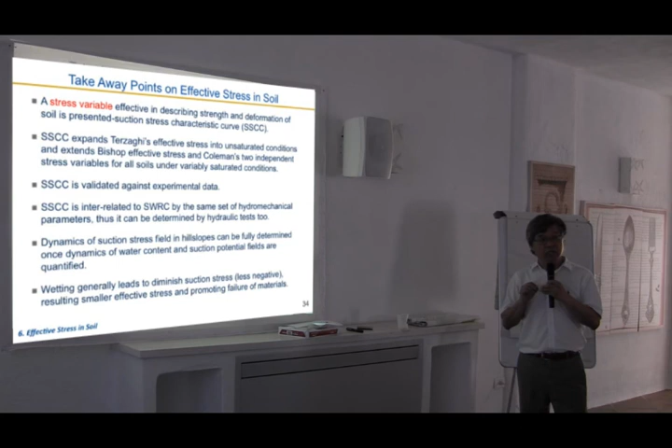In other words, it will make the effective stress smaller. That's generally speaking, and it will result in a smaller effective stress and promote failure of the material. That is the explanation from the effective stress framework I presented this morning. Thank you very much. I think we should take a break.